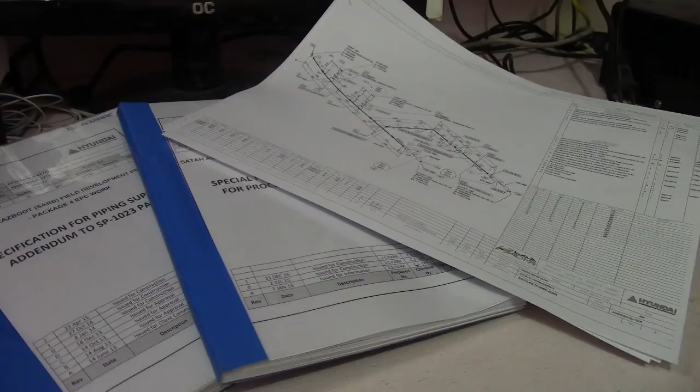I will show you how to check this booklet of piping support, special support, and specification of piping support for these two booklets, and I have isometric drawings here. So they have 1, 2, 3, 4. I have 4 isometric drawings. Okay, let's start.

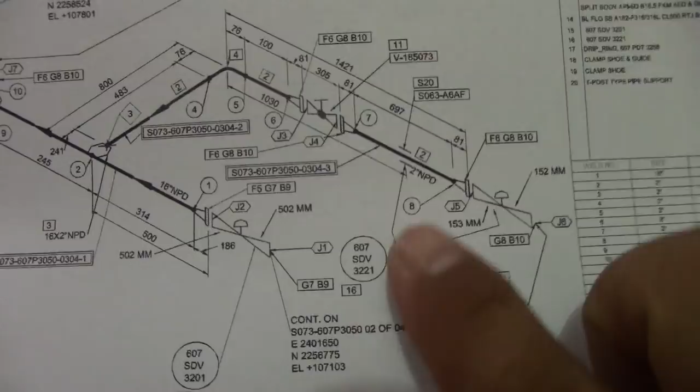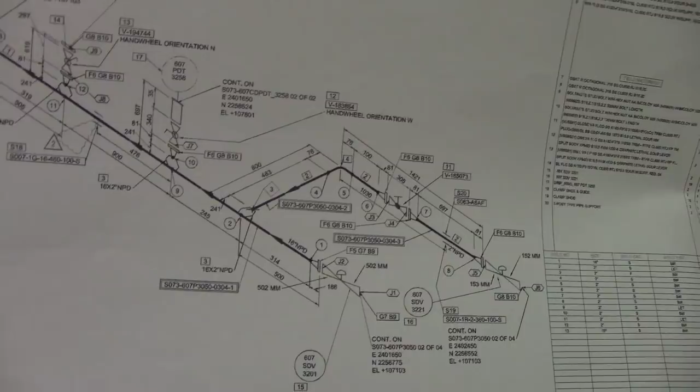Okay, for this isometric drawing, how many supports do they have? So this is 1, this is the symbol of support. Okay, this 2 line here, and 2. So there are 2 supports. Okay, so this is a simple way of how to check the support drawing in the support details.

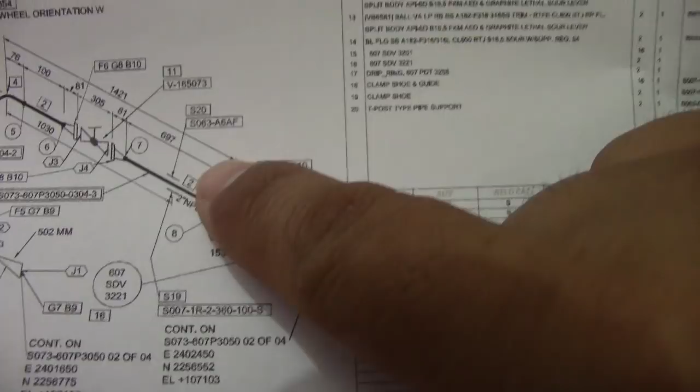Now this is the specification, we will check here for this specification of piping support. So the details for this isometric drawing is this arrow, check this arrow. There are 2 supports, they are S20 and S19. So this S19 is S007 and S063 for the S20.

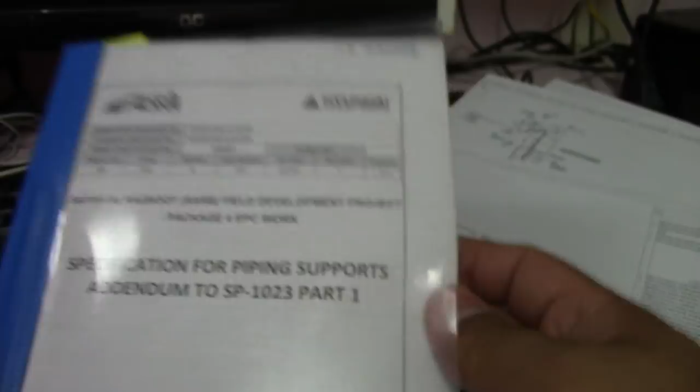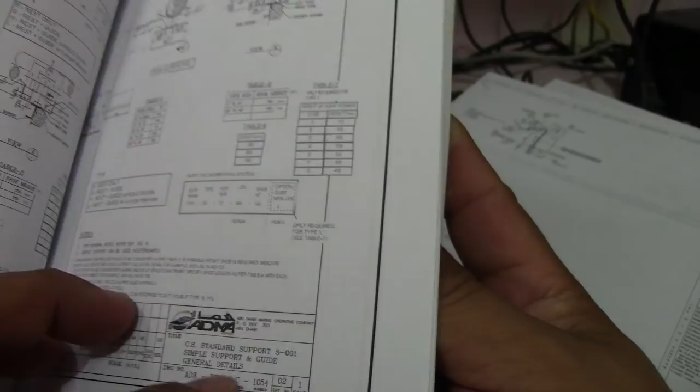Now we will check for this support details, so the S20 and S19. So this is by numbering, for this number 1, this one S001. So we will check for another page, S19, and more page here, this is S15.

Okay, so this is it. So they are S19, so we have support here. Isometric is S019. So this is S19, okay, S19. So this is the details for the S19.

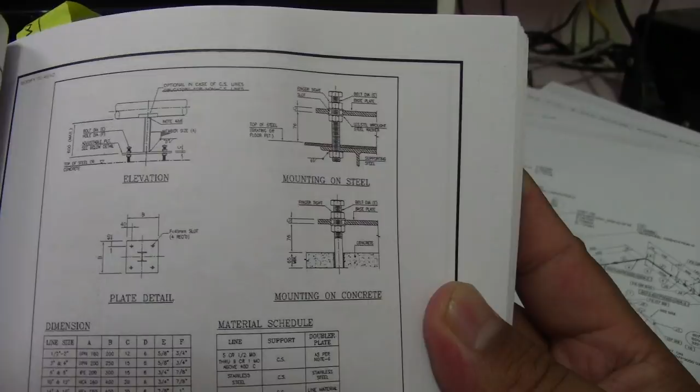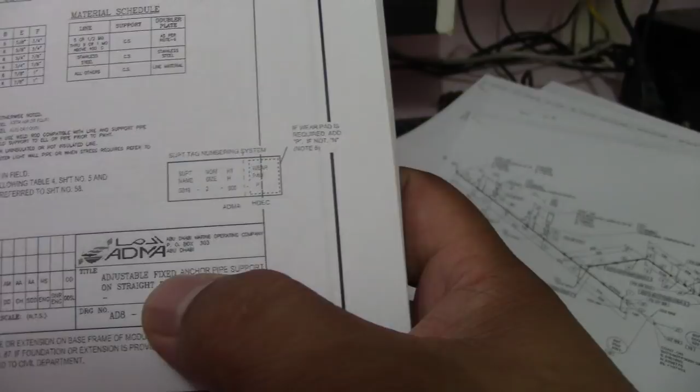And then in the details of S19, this is adjustable fixed anchor pipe support on straight pipe. So this is the details from S19. So this is adjustable, they have elevation, details elevation, plate detail, mounting on steel, and mounting on concrete.

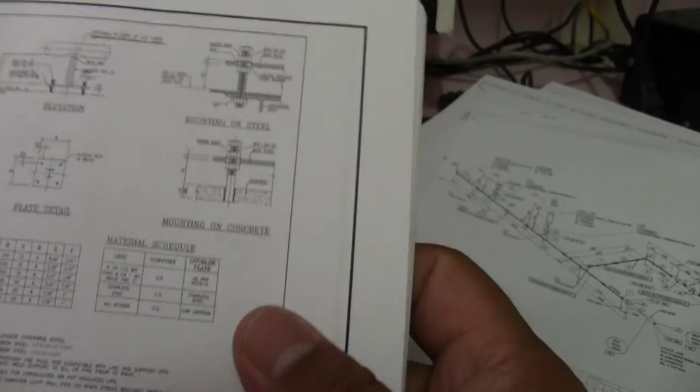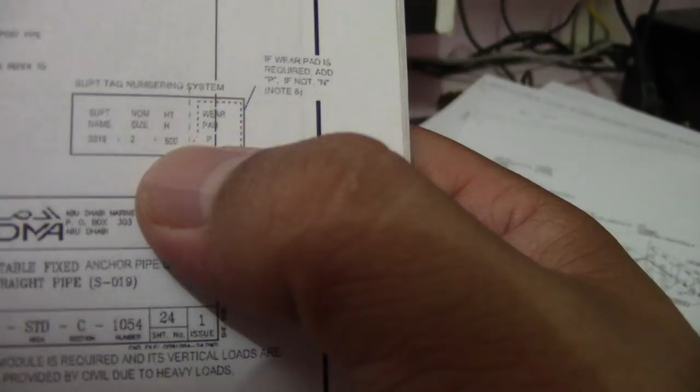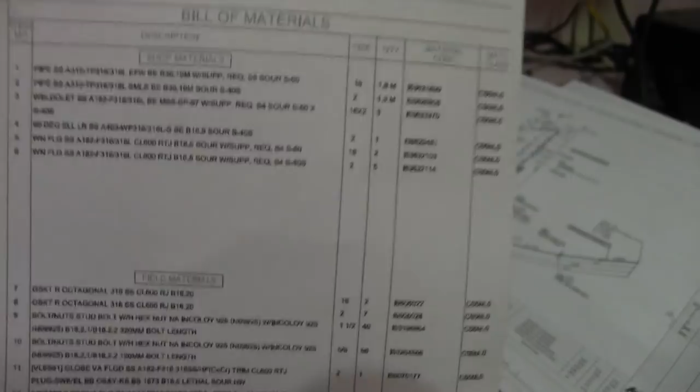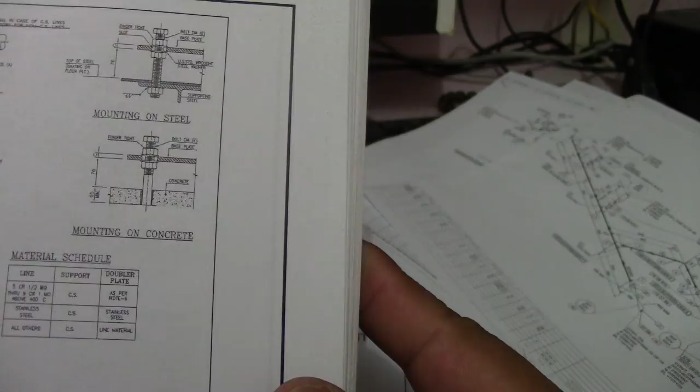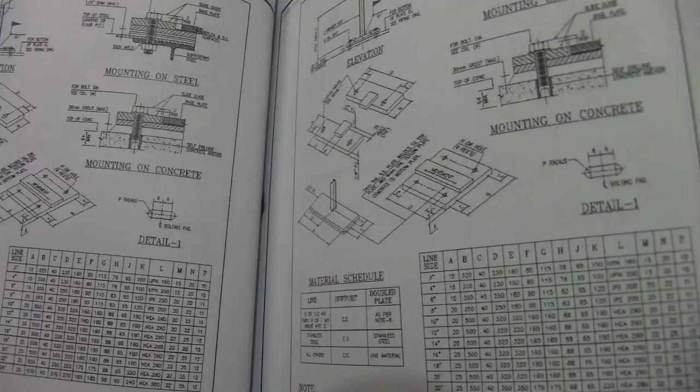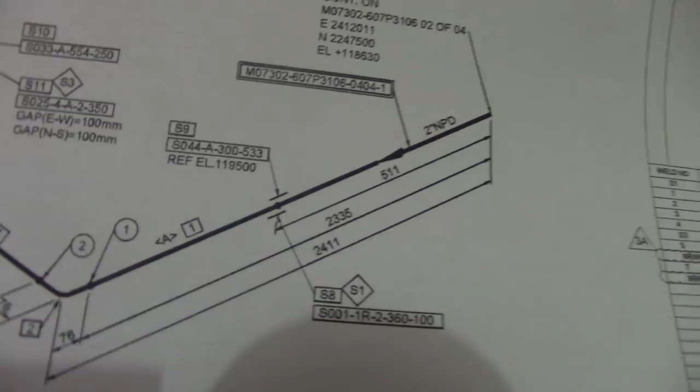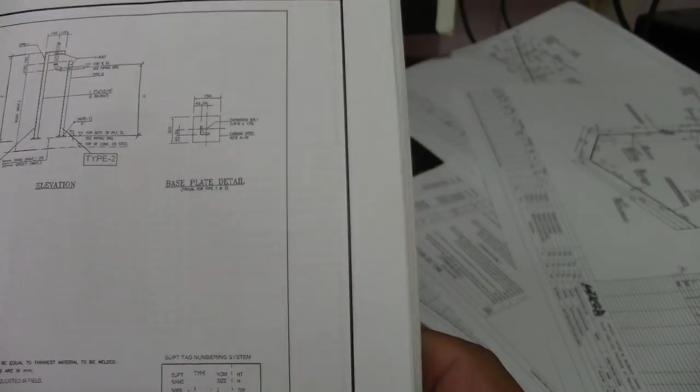Okay, so that is how to check for this booklet of piping support, we will check another support here. So here we have our S9 and this is S9 and S8, we will check here also. We will adjust backward. S8, okay, S8, S8, S8, this is the S09, okay S009. S9 and S8, this is S001 and S001 and S044. So we will check here the S001, first page here.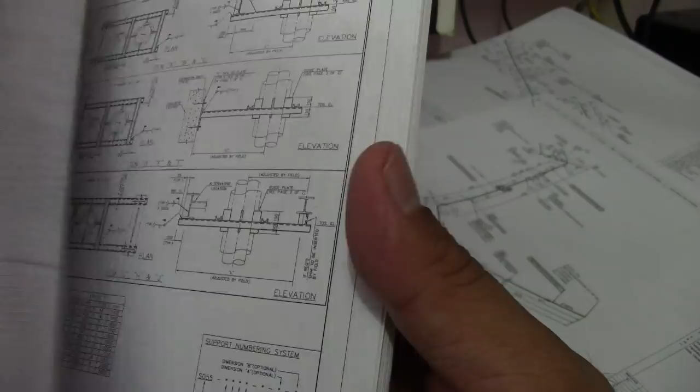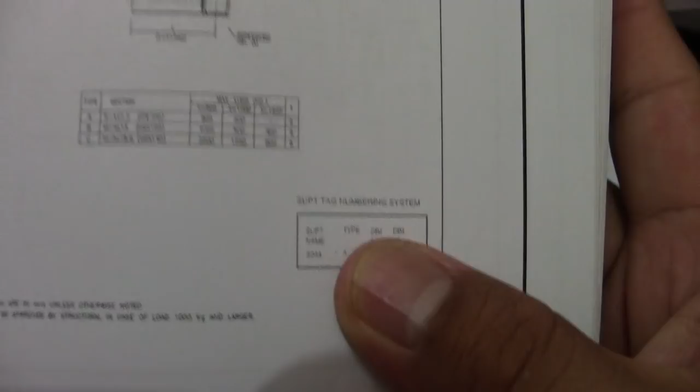And another support here is S044 and the S29. S044, so we will adjust here the S044 details. Okay, that is very simple how to check the support, also support details here. So this is S048, this is S040, see that, S044. So this is the type of support installed in the side. Okay, and here the general details, the dimension, and also what steel that you can use.

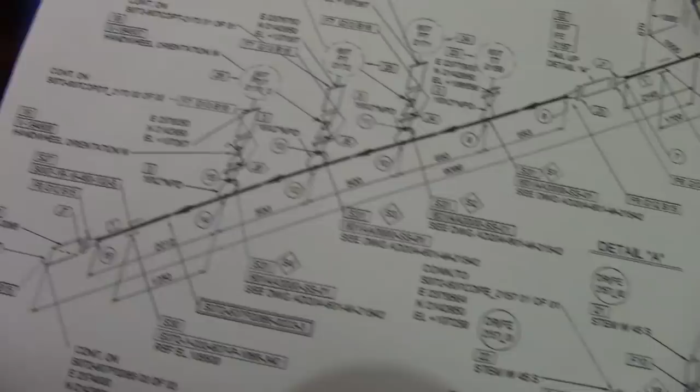And they have, we will check another isometric drawing here, so this is another drawing, okay. This is for the special support, we will use this special support here because this is the number of support here.

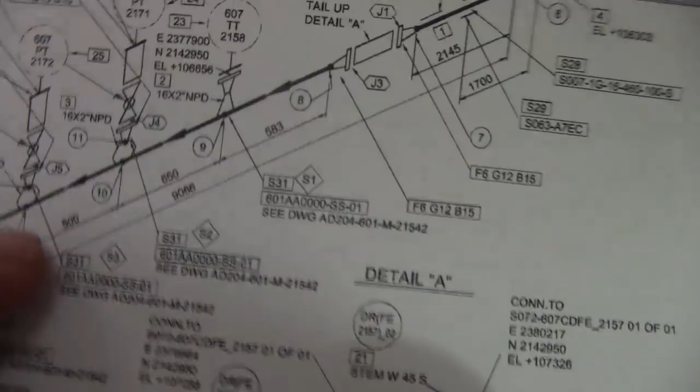601, 601A, okay, 601. So we will check here, we will not see here for the support detail, so we will check here the special, for the special support. Okay, so this is 601A, so this is our support here, arrowing from this flange. Okay, all arrow this support from this flange, so meaning for this flange they have a support there. So we will check this 601, 601A.

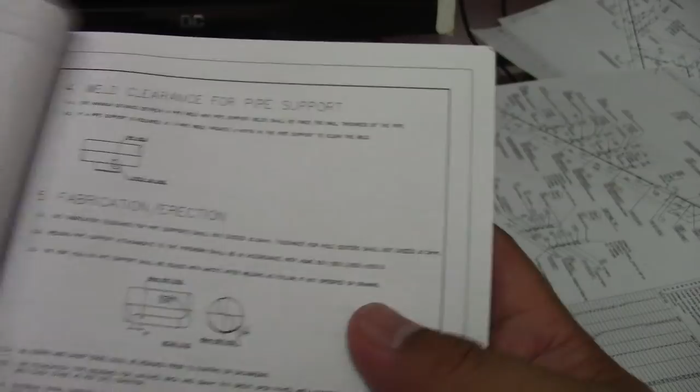So they have some, okay, so this is a general, they have also general notes here, material, weld clearance, fabrication erection, okay.

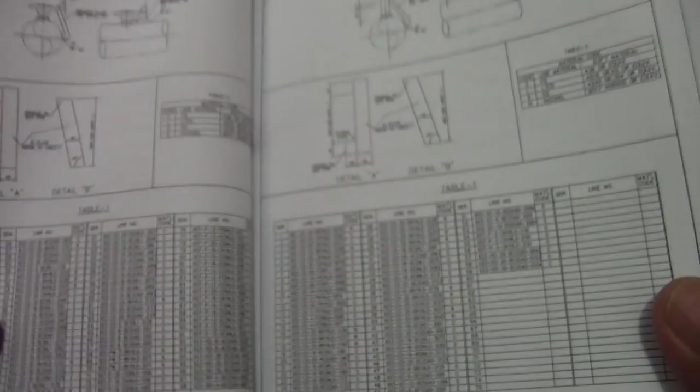Let's try to see this 601. So this is it, this is the support there, this is the support type here. So this is, we will check again the support detail, see that? This one.

601AA 0S9 SS01. So this is the support number here, 601AA SS01. So this is the support details you can install in this flange, support from the flange and also from the pipe. Okay, welded from the flange and welded from the pipe, and also this one. Okay, this is the details drawing here and the dimension.

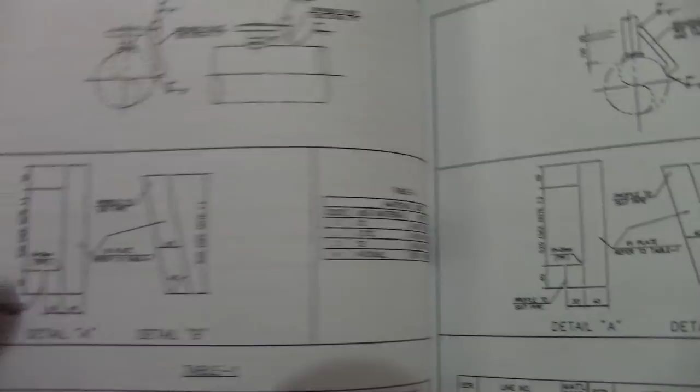Okay, so this is very simple to check for this support details.